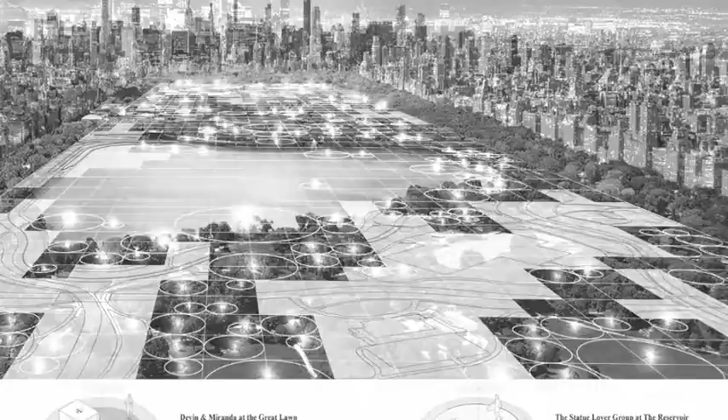We have done projects aiming at helping reforestation on a planetary scale, providing solitary space for lonely urban dwellers in metropolitan areas, and suggesting new protocols for people to utilize public space during the pandemic era. Our vision in this design competition is to build a truly inclusive homeland on which humans and other living systems subsist equally and harmonically. This new post-human territory will challenge traditional human-centric urban development, strengthen the concept of global sustainability, and redefine the concept of oasis.

Planned to be the world's largest waterfront development, shaped like a crescent, the Dubai waterfront is in trouble due to financial crisis, land sinking, rising sea levels, and ecological controversies. What should be built to demonstrate Dubai's ambition to be the greatest self-sufficient and climate-friendly city in the world?

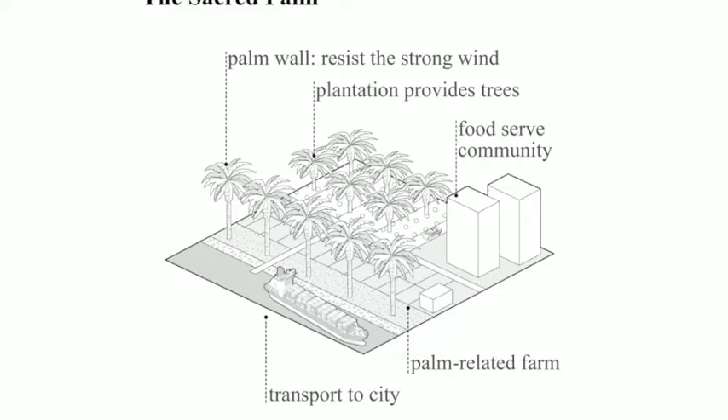Date palm remains an important part of Arab culture, while Dubai's Palm Island project is inspired by the image of a date palm. We argue that the tree can play a bigger role rather than just a graphic reference. This newly conceived date palm will support the prosperity of all life forms, provide resources and technologies to build self-sufficient communities, and trigger reimagination of the city's future.

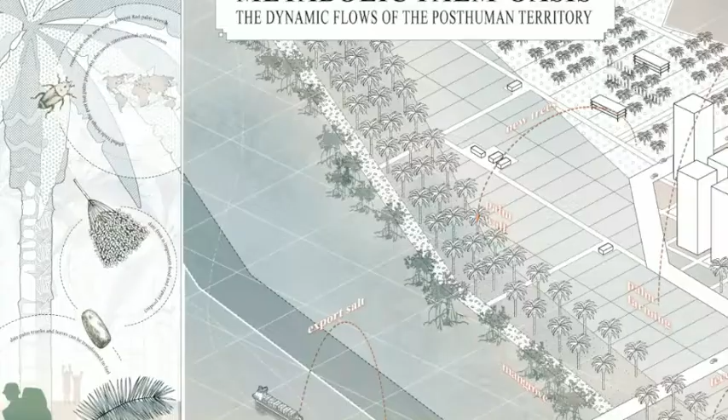For such a goal, 3 palms are proposed in our scheme. The sacred palm is an ecological security system based on the date palm tree. Rows of date palms are planted to block strong wind and stabilize soil, as well as providing food, materials, fuel, and other resources to support the island's metabolism.

The marine palm is a series of artificial islands floating on water with structures going all the way down to the seabed. The leaves are plastic containers, algae farms, and scientist centers, while the stem is sensing devices and sonar hydrophones for detecting the condition of coral reefs and marine habitats.

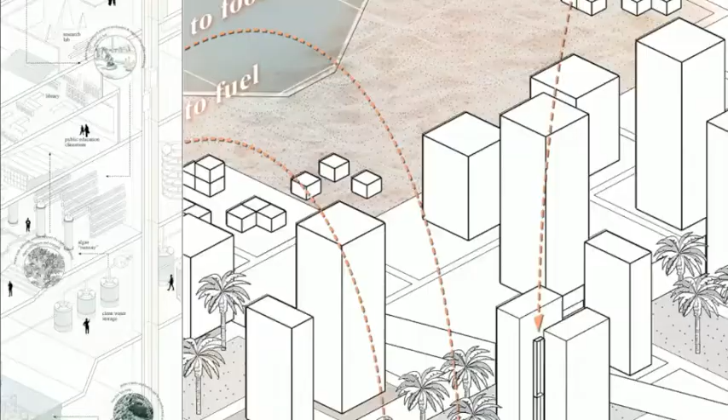The terra palm is a machinic megastructure combining the function of data center, research lab, saltwater purification, and clean energy generation. It serves as a contemporary version of the Tree of Life in supporting the city's everyday life.

So how does the 3 palm strategy apply to the design of the island? First, the sacred palms support the self-sustaining lifestyle of the island's residents by defining the spatial framework. The marine palms float along the coast, while the resources they produce are transported to the island. The terra palms are the engines below ground, offering technology and energy support for the island's daily operation.

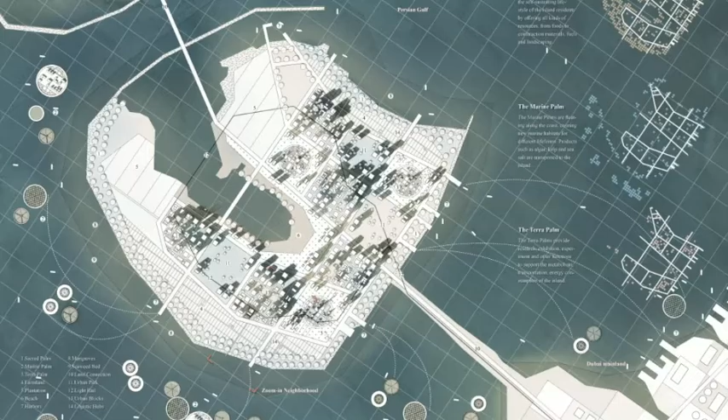The island is reinvigorated, and the lives of human and non-human species are activated through the implementation of the 3 palm strategy. When zooming into a specific neighborhood, one can see the everyday life happening on the island. But what's behind the scene is a complicated yet highly integrated system.

This is the core spirit of our proposal, the Palm Oasis, a comprehensive system underpinning the future lifestyle of the island, just like how date palms supported the traditional lifestyle of the region in the past thousands of years. Please reimagine the future scene of the island with us, with the self-sustaining idea of the 3 palms system, and with the belief of creating a more-than-human neoasis for the island, for Dubai, and for the world.

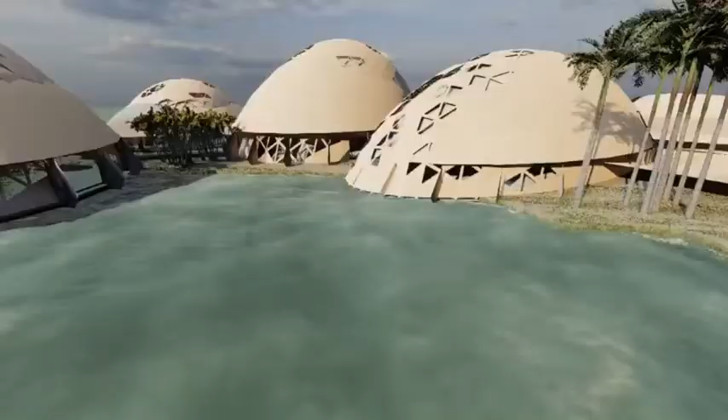Dubai is used to building a lot of high towers, so we started to think in a different way. We made Zart. Zart is the only oasis that can survive if any disaster happens. It's a mixture between nature and technology. We made it indestructible and it has all human needs.

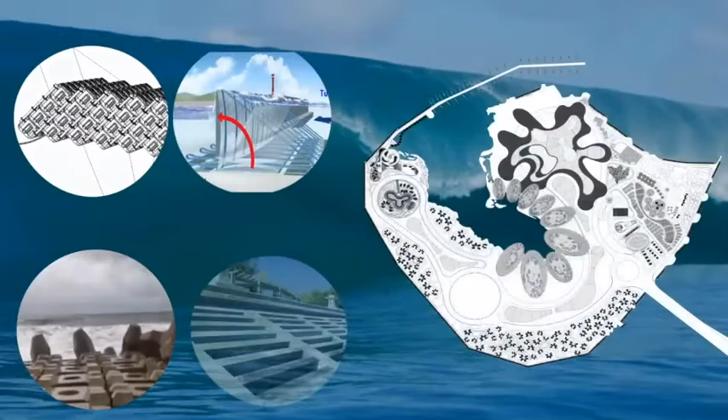In 2050, sea level will rise 30 centimeters. Therefore, wave breakers were used to reduce the intensity of the waves in the waters close to the shore and thus provide a safe shelter.

So we started using wave breakers that produce energy at Zart. In 2100, the North Pole will melt at a very large rate, and this will lead to many incoming disasters such as storms, hurricanes and floods, amounting to death, destruction and the end of the world. Thus, most buildings and towers will be destroyed in many coastal countries.

Hello? Is anyone there? If you receive this, I need your help.

After the great destruction that occurred in many coastal countries, a light of hope appeared to live without the effects of disasters, and this was only at Zart Capsule's mini-city. But how did this happen? When the water level rose significantly more than expected, many coastal buildings were destroyed.

Since taking the survival concept from nature, our only choice fell on the turtle, the most naturally protected being against any kind of disaster, so we took its way of life where it is able to live both above land and below water. Zart Oasis capsules were launched automatically into the sea to sail without being affected by the existing disasters.

Let's see how this capsule mini-city could survive. We have in each Zart capsule all human needs such as clear water, food, and energy. Zart Oasis. It is the oasis in which you can live comfortably and reassuringly. It's the true example of the oasis as it should be. Each part of the oasis will separate automatically during a disaster.

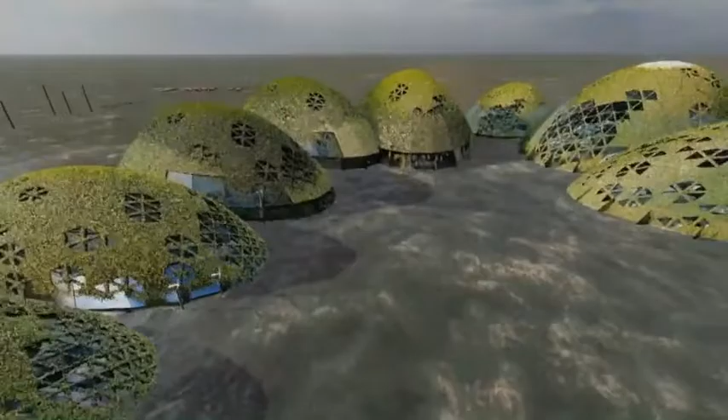Zart will be everywhere, in all coastal countries in the whole world, by 2500. Zart. It's the real home. It is the safety. Zart. It's our last sanctuary.

The Great Artesian Basin, Australia's largest and deepest source of fresh water throughout the inland. Hidden beneath layers of sandstone from an epoch before humans, the Cretaceous Earth has offered us a unique geological formation for which many species benefit. Water, vital for all life on the planet, and the hallmark of the oasis.

That very same Cretaceous crust emerges at the Winton Formation, a mesa rich with the footprints of the past. A fertile land, in jeopardy of desertification. The landscape is ripe for sustainable development, like the creatures and organisms that call this land home. Self-resilience is the way of life when you live in the outback.

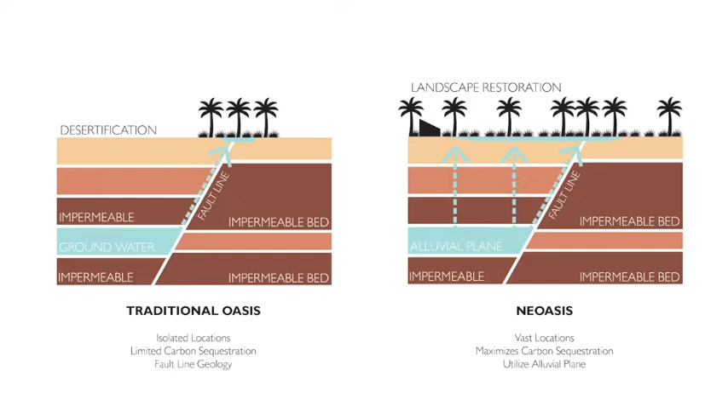The neOasis proposes a new ecology through architecture, infrastructure, and nature. The inhabitants of the neOasis range from both human and non-human entities, which provides resources for all creatures within its landscape. The mesa becomes the home for a multi-species ecology. Tapping into the alluvial plain beneath the surface of the bedrock gives rise to a new synthetic ecosystem. With this new microclimate, biologists and other researchers are given ample opportunity to study emergent species and landscape restoration.

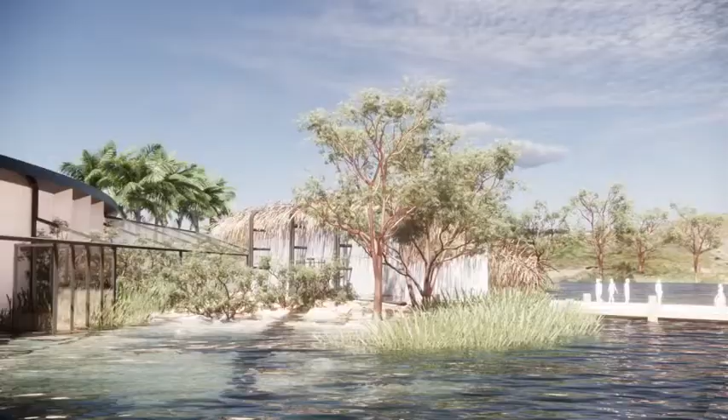The neOasis balances both the manicured and the wild. This balancing act between what is maintained and that which is natural plays a key role in the project. Rows of agriculture are balanced with vast open areas where nature dominates. These two exist where one is no more important than the other. They are equals. Teaming with Australian Age of Dinosaurs Limited, the project seeks to further the research work and dinosaur digs currently located within the Fossil Preparation Laboratory.

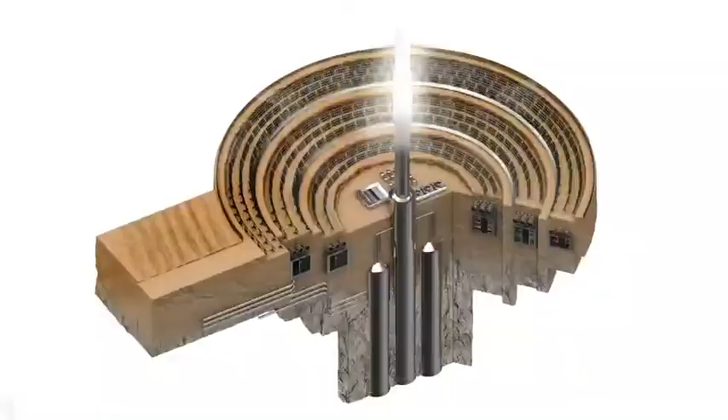Visitors will be able to engage directly with the research happening at the neOasis and witness firsthand its impact on this community. While recognizing imminent global climatic change, the neOasis draws upon its history to act as a method of carbon sequestration. Innovating beyond simple terrestrial carbon capture, the neOasis aims to pursue direct air capture and capitalize on the geomorphology of the project.

Looking toward early and contemporary Aboriginal art, the neOasis draws inspiration directly from the historic and ancient pattern-making of these ancestral lands. Being as much a part of this community, the project seeks to bring those that are close and near to the land together with those that come far and seek to learn, using natural delineations of the surface, water, topological tensions, and those that are synthetic, solar panel arrays, and road. A new hybrid geometry is generated.

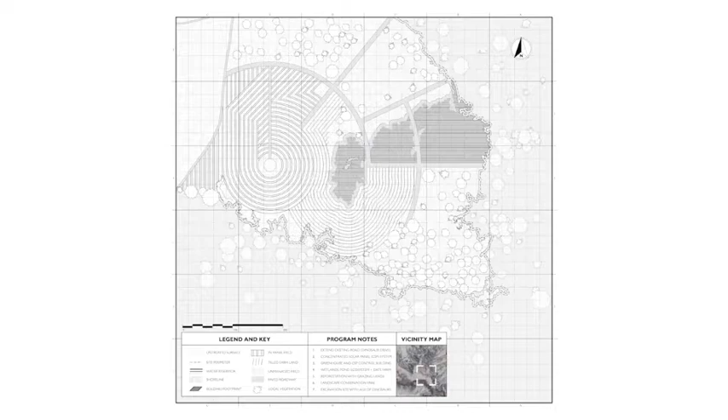This diverse tapestry of humanity brings the neOasis specific to this site. This development brings forth a unique opportunity to generate a new future, one that is tolerant and inclusive of its inhabitants. The neOasis is a place for everybody, a diverse multicultural hub blending nature, technology, and culture, its historical roots and traditions, pursuing new ideas in the next epoch of planet Earth.

Our society is anything but sustainable. Our population is continuously growing, our resources are becoming exhausted, we are running out of time and space. With 95% of the world's population concentrated on just 10% of the world's land, capitalizing on the abundance of renewable natural resources at our disposal provides hope and a way forward into the future.

This project explores the reimagination of the oasis to improve livability in the face of increased desertification. The literal definition of an oasis is a fertile spot in the desert, mostly where water can be found. On a metaphorical level, however, an oasis symbolizes a moment of respite from the harsh conditions of the environment. It becomes more than just a mere fertile spot. It becomes a place of hope in the middle of despair. It becomes a promise of a better future.

With our design, we intend to create more than just a place that people can live and work in, a new oasis for its inhabitants.

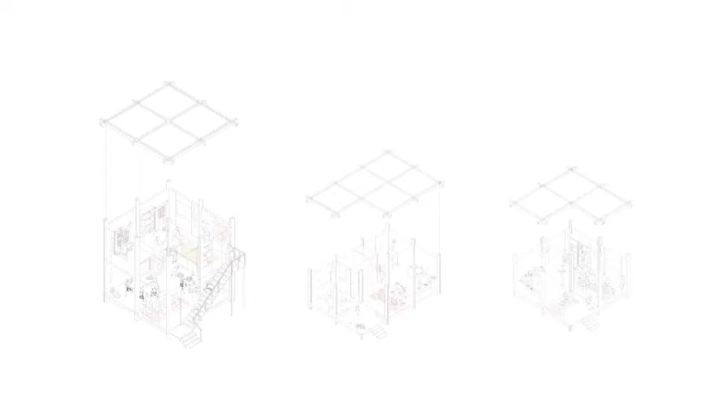Our proposal consists of 3 typologies that are an armature for the system. These simple structures are modular designs that are highly adaptable, creating flexible space that can transform into whatever they are needed to be, without imposing an external identity onto the inhabitants.

These typologies will be constructed from materials found within the system: wood milled from the date palm grove and earth insulated with date palm leaves. Infill panels are placed on the exterior wall facades and assist in the collection of water and food production.

The first typology is the production or economic typology, which capitalizes on the skills and materials produced on-site within the desert climate and financially supports its inhabitants.

Moroccans have a strong tradition of weaving. The leaves from the date palms and the processed sabra silk from the Moroccan agave will be processed and woven for export, allowing the inhabitants to strengthen their cultural traditions and produce an income.

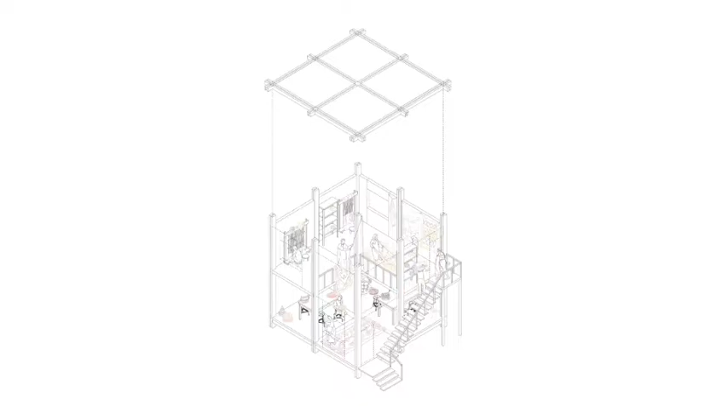Excess food produced on-site, including agave nectar, spices, turnips, oranges, sunflowers, tomatoes, watermelons, and dates, to name a few, can also be processed and sold to surrounding villages.

The second module caters to the residents within the oasis, supporting a higher density within the existing area to accommodate more inhabitants and create a thriving oasis.

The last module is a cultural typology, providing space for people to come together to pass on skills and traditions of place. As an inclusive area, it gives opportunity for everyone to participate in society and ensures that everyone's needs can be met through a sense of belonging.

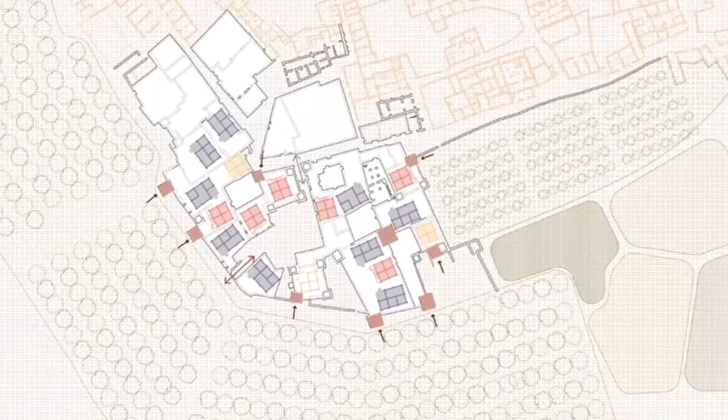The established system through the typologies will create an oasis perched on top of the existing ruins of the Ait Ben Haddou Citadel. Access to the settlement occurs through the towers located at the edge of the existing fortress walls. These towers serve as vertical circulation for people and water distribution, ensuring a high level of permeability throughout the master plan.

Water will be sourced from a nearby aquifer that uses a traditional Qanat water system. The water will be transported up to the settlement via a series of solar-powered Archimedes screws aligned within the circulation cores.

Typologies also feature a water collection infill panel that captures the humidity from the air and collects it within dwellings, similar to the work undertaken by Warka Water and inspired by darkling beetles of the Namib Desert.

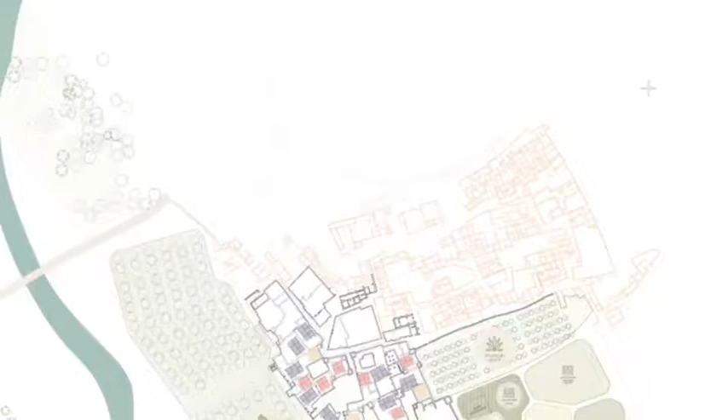Food will be produced in allocated spaces surrounding the site and the infill panels of the modules. Plants that can grow vertically and in desert climates, such as beans, peas, eggplants, cucumber, zucchini, tepary beans, pumpkin, paprika, jicama, will be grown in the infill panels.

Plants that require more soil and land, such as turnips, date palms, watermelon, tomato, sunflowers, and agave, will be grown in the surrounding land. Sited in a desert climate, the area reaches a temperature high of up to 40 degrees Celsius and relative humidity of 60%.

Within the human comfort range, falling between 22 and 27 degrees, and relative humidity of 40% to 60%, climate analysis has revealed that the climate is comfortable for only 20% of the year, making passive cooling throughout the design essential.

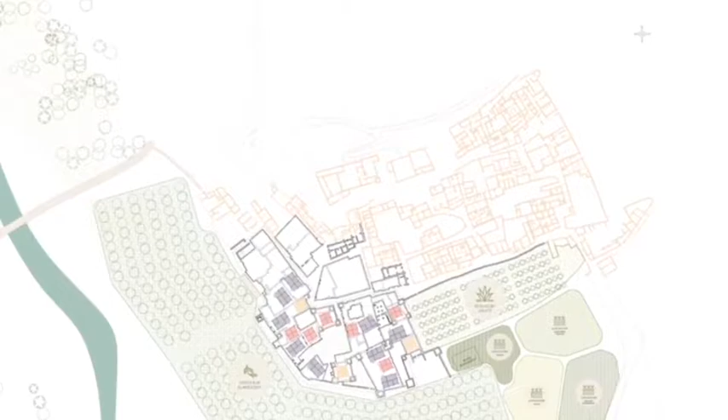The positioning of the village above the ruins allows for the optimal capture of the northern and southern prevailing breezes. The placement of the date palm grove to the south ensures that the warm winds from the Sahara Desert are cooled before reaching the oasis.

The modules have been designed to allow for cross-ventilation through the spaces. The choice of rammed earth as the primary material of the module ensures a high thermal mass and provides the opportunity for night flushing as a means of cooling.

The water collection system throughout the master plan provides opportunities for evaporative cooling, and sun shading on the windows assists in reducing the internal heat gain on the inside of the buildings.

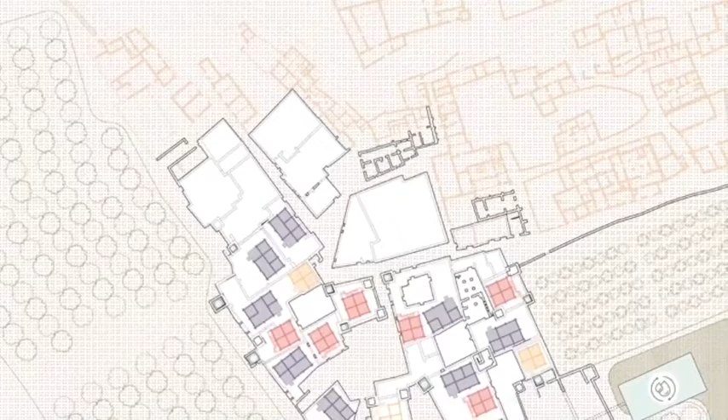Solar panels will be used to capture sunlight and convert it to usable energy to power the oasis. Solar panels will be placed on the modules, in addition to a more extensive solar power farm outside of the settlement, to support the energy requirements.

As a precious commodity in a desert, water will be treated at a Biolytix BioPod that uses tiger worms and microorganisms to convert raw sewage and wastewater to high-quality irrigation water for the date palm groves and agricultural fields.

Waste from the production modules, particularly food processing and weaving, can be used as fertilizers to enrich the agricultural production.

These simple structures act as modular systems that are highly adaptable depending on the usage required. They respectfully add onto the existing citadel without any disruption, retaining the language and essence of the historical site.

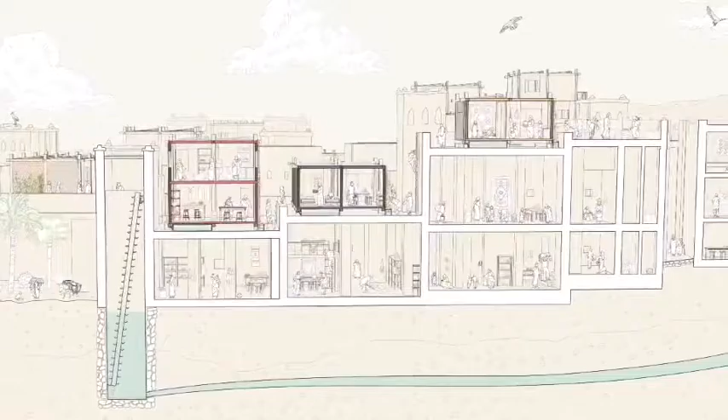Utilizing natural resources and environmental considerations enable this design to naturally grow as an ecosystem within a desert climate, making it an oasis that meets any requirement of the human needs of its inhabitants, and ensuring cultural and economic progress.

Amidst the depressing city life, resources guzzled out over the long-gone remains of nature. The future felt as dull as the city's concrete jungle. I feel helpless. Hope is no longer with us, echoes around the city.

Just then, a blaze flashes over the dark skies. The light flared so bright that people were hiding from it. A bird figure strikes faintly behind the light.

After the light vanishes, people realize that seeds are scattered over the town. One of them fell into a patch of arid land and grew into a sapling. Only then the citizens realize, from the burnt ashes of life, the phoenix will rise into its glory, and so are they. The reinvention of the city begins, the oasis of the phoenix.

Welcome to our sustainable city. We built this together out of dry soils years ago.

Please park your vehicle here under the shades of our solar panels. We welcome visitors to stay at these apartments.

The food of shopping streets are fresh from our permaculture and hydroponic system. Please try our handmade craft from the date palm grove, managed by the women's community.

Our central oasis supplies water all over the city through piping, which also serves as the downstream of the four water canals. A mosque is built on the water surface of the oasis as the religion center of Muslims.

Our international school offers education with a culture-based and sustainable curriculum. The students will also be given community-based projects for permaculture and oasis development.

The permaculture area consists of food forest, community farm, production forest, and husbandry. This site produces 50% of total consumption, managed by the local farmers and agricultural community to reduce the dependency from outside products.

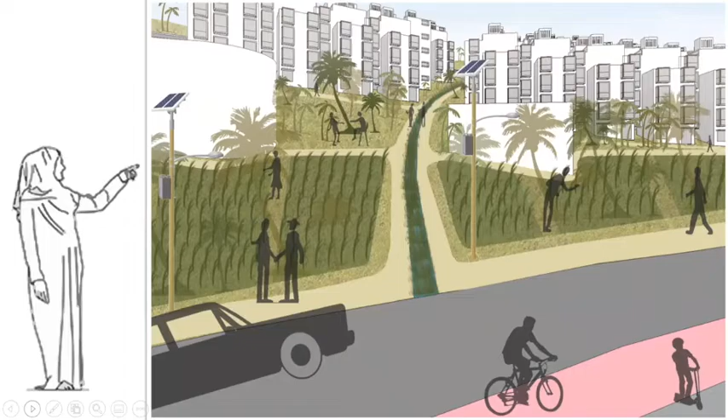The upper part of the city is the housing cluster, which was built near the field so the local residents can easily work there. The houses are built according to incremental housing and designed based on sustainability principles.

Each block of the neighborhood is equipped with its own water treatment plant and waste pickup sites.

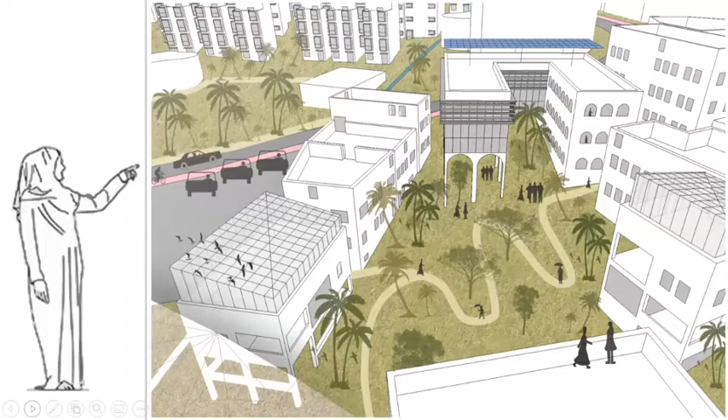The mini oasis is built on the center of existing buildings that are reused for creative culture centers, including the women area, the women's center, as well as the neighborhood council.

Learning Center is the heart of the learning community and networking of the city, where residents and visitors are able to hold meetings.

Something that is as small as a seed can bring significant development if everyone works hand in hand. This is the glorious era that must be preserved, where the sky is blue and the gardens are green for the longest time.

All this time, the phoenixes are secretly watching them behind the trees, showing their fire wings and the sun to the sky. Nobody knows why. One thing for sure, the birds of hope continue their journey looking for another land.

For example, we are using eggshells as a basis to create habitable cocoons. Due to the prevailing weather conditions, they require good ventilation. Therefore, to create aeration, the buildings will be elevated. Installing a cradle-to-cradle design with locally available materials allows us to put in place a regenerative and circular economy, promoting a sustainable way of living from one generation to the next.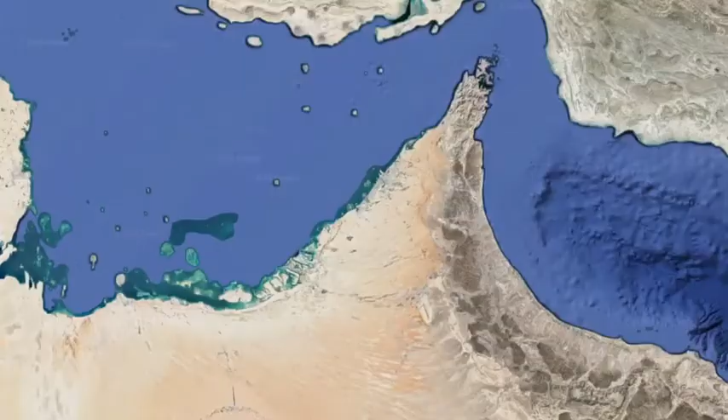What is an oasis city? A safe place to work, walk, and rest. It is EXPO2020, a pilot neighborhood for a future island city in Dubai.

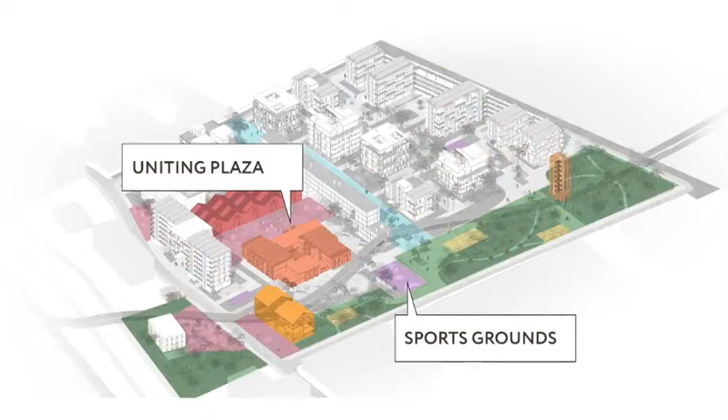It reinterprets the legendary urban grid, blending the site's post-industrial landscape with a strong multi-comfort strategy. The layout features a huge plaza, semi-private community alleys and courtyards, immense archways, intricate facades, and brightly lit horizontal urban farms. Art centers in ex-warehouses, neighbor community centers, on rooftops and ground floors.

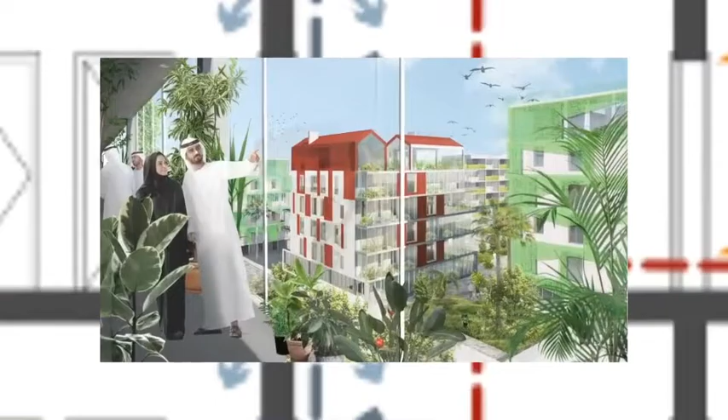Holistic environment control system ensures the dwellers' comfort with green roofs and facades, shady balconies, thermal and solar panels, and marine water filtration. Accessible pink-led urban grocery farms provide healthy local food. A pedestrian bridge shows a charming skyline of the pilot neighborhood. It is a detailed model that can become a prototype.

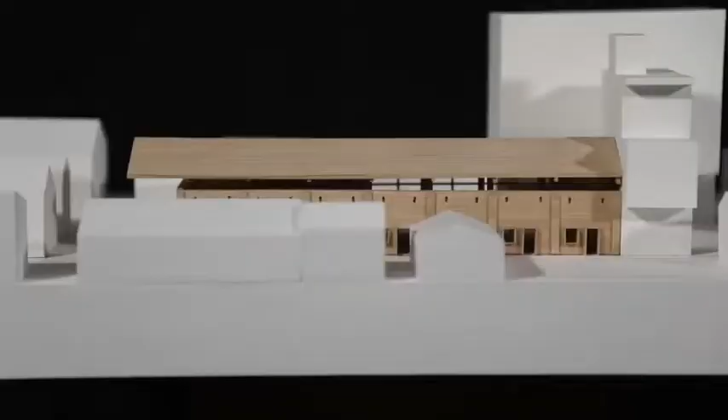We are TIACH. In Buffered Space at Kazan University, we address experimental design and social patterns, competing with the world's best architecture schools. Our students are idea generators who can conduct work from the initial concept to detailed design project. In a single space, diverse students conduct visionary research and practice, using professional tools from hand drawing to digital prototyping. Our studio has won architectural competitions in the USA, Canada, China, and Europe regarding sustainable construction, eco-materials, traditional lifestyles, and symbiosis with nature. By raising courageous professionals, our city and the world will be transformed.

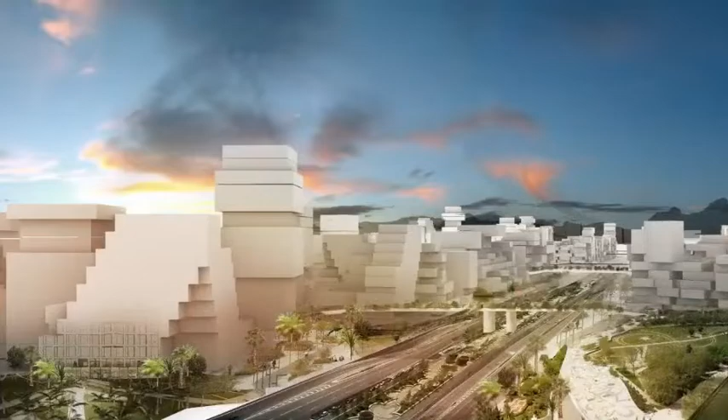Can there be a dream city in the Australian outback? Dinawood is the epicenter of cinema fantasy worlds within the famous Dinosaur Trail. Blending iconic buildings with natural hills, Dinawood City fosters local businesses and arts, attracting tourists, artists, and ecology scientists. The existing road becomes Avenue Australia, a vibrant storyline of sustainable urban life.

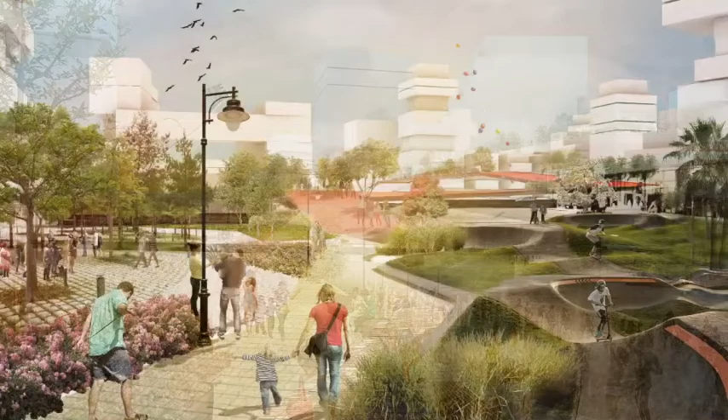It impresses visitors with monumental architecture resembling ancient rocks and with dynamic circular energy technologies. Green Dinawood Hills with a cable railway lead to the natural prehistoric scenery, while the city itself resembles a film studio. Public squares bustle with events like cinema pavilions.

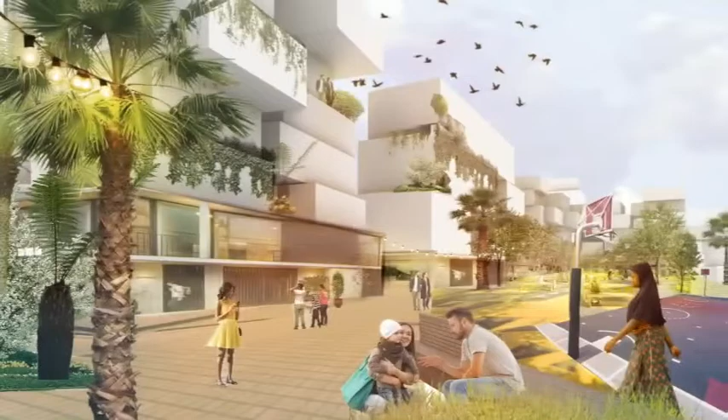Experimental housing provokes personal gatherings. As a creative production site, the city leaves a low-carbon footprint. Its game-like patterns inspire people to be curious and creative. It is a detailed model that can become a prototype.

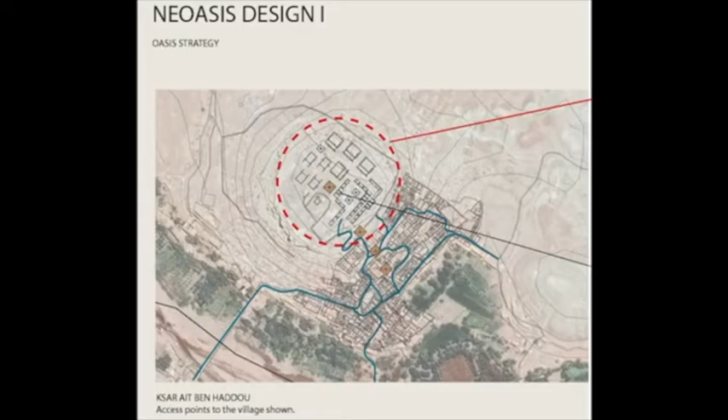Our design concept consists of reviving the already existing buildings by adding more facilities for people of the town to use, such as electricity and running water. Using sustainable architecture and design techniques to address the bioclimatic issues and socio-climatic points to avoid desertification, and also give equal opportunity to the villagers by reteaching them traditional building techniques and new techniques to create a self-sustainable village for themselves. Our design proposition is that we are suggesting a new village centre with the production of new infrastructure.

Our oasis strategy is reinstating the khettara technique. We created this using sails in which form was inspired from the date palm trees from the oasis. The construction consists of using wood from palm trees and fabric made by weaving. This can be done by villagers and passed down to future generations.

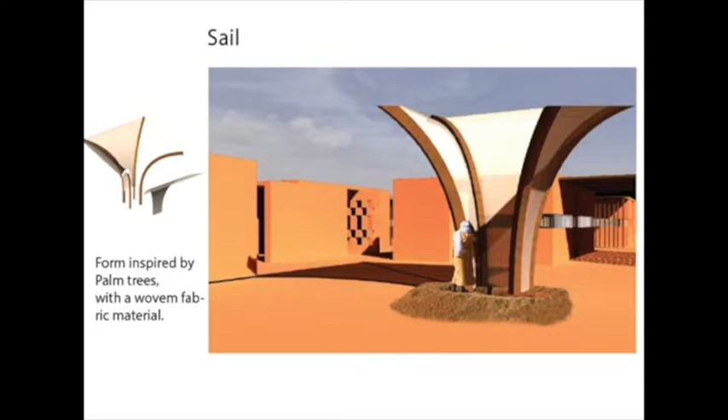Powering the oasis: to bring power electricity to the site of the Ksar, we will tap into a solar power plant in Noor, located 40 kilometres away, to provide electricity to the town through the national grid. We also want to include separate solar panels as a backup source, which inhabitants can install easily on the roof. We found a new technology that is film-like and can be installed very easily and printed from special computers.

Re-educating traditional practices. In order to create equal opportunity and allow all villagers to be part of a thriving town, we can use old weaving techniques where women can learn and reteach the skill and technique to other people. The khettara can be created by the men or women who are up to the challenge. All of the new proposed buildings will be prefabricated blocks to create an easier build.

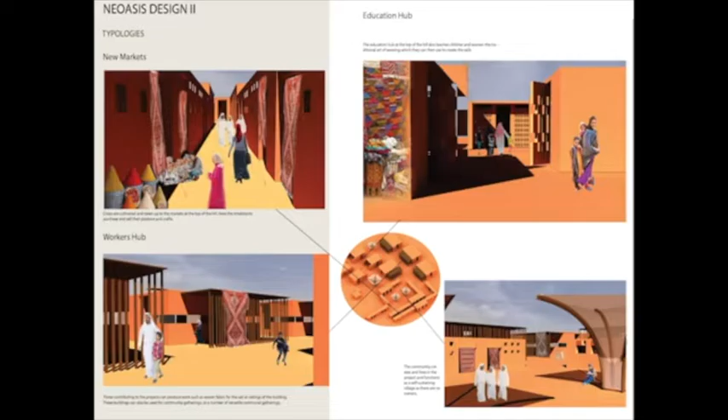Our typologies: we also aim to introduce 3 new typologies to the new village centre at the top of the hill. With this new area, we hope to create a space in which the community can gather and enjoy together. We plan to propose new markets, some education hubs and working hubs. These spaces are very adaptable to what the community will want and use the spaces for, giving great opportunity for learning, working and trading.

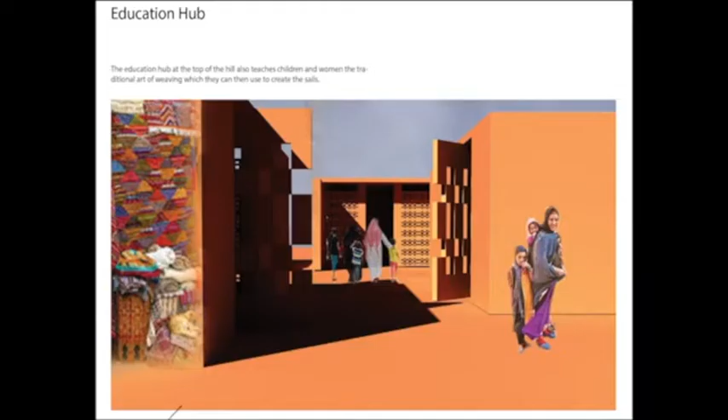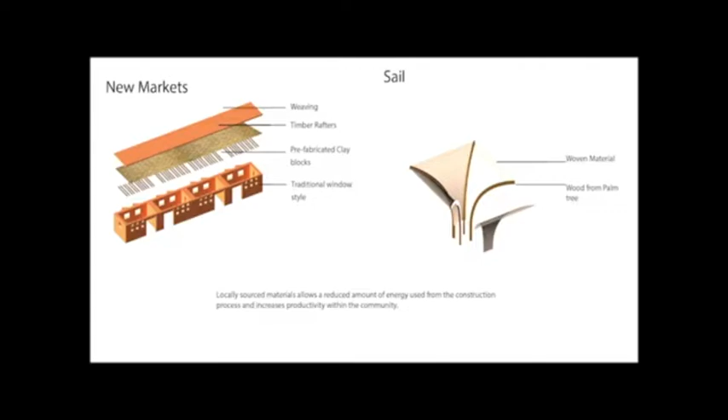Using local materials, it will not only be sustainable but very low costing and energy efficient for our construction methodology. It will also be easier to teach the locals construction skills and also for them to maintain it. The buildings will be made from local materials such as prefabricated clay, rammed earth walls, timber, palm rafters, woven fabric ceiling which will allow women to participate, and local craftsmanship. Window types keep the traditional architecture with some design changes to improve performance.

Also, we will be implementing good passive design methods. Everything has been carefully integrated into passive design strategies to create livable habitats. Modular windows can turn in accordance to solar access and wind access at any time of day. Woven fabric used in the roof construction will act as local insulation, reflecting the traditional customs.

The placement of the buildings will further allow circulation through the town and also small pockets of open spaces where events can occur, also controlling the wind access and solar access for certain buildings. Bringing solar power to the town will give universal access to safe and affordable drinking water and sanitation. Solar panels as well as reintroduction of a khettara will create a sustainable environment for the town.

Our urban circulatory of resources begins with the environment. Water source is then taken to the oasis, which produces food and vegetation. This then circulates to the community through cultivation and markets, then food consumption, and then down to food waste management, going back into the oasis to start the cycle again. We aim to make this a very sustainable part of the new life of the villagers that come over to our site, and hopefully it will enhance their lives.

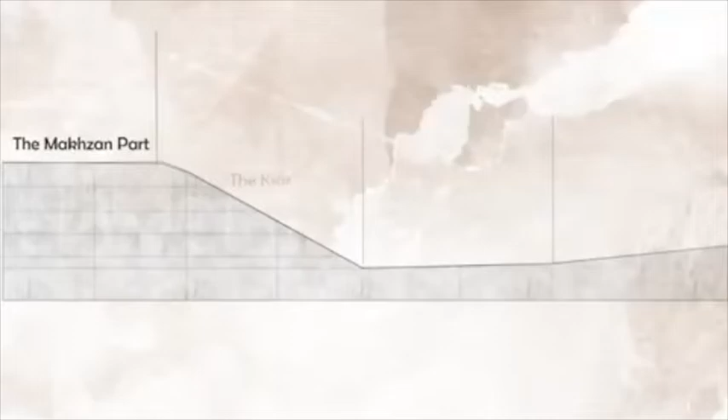The region of Ait Ben Haddou includes 4 main levels: the Makhzan, the Ksar, the river and oasis, and the new center of Ait Ben Haddou.

The main objective of the Oasis Lab is to reflect and advocate the potential future of Ksar Ait Ben Haddou while celebrating the Oasian culture.

Through the use of materials, technology, and landscaping, the project primarily explores and attempts to address the following: breaking the depletion of the oasis and its habitat, combating desertification, ways the Oasis Lab can impact and contribute to the surrounding areas, evolving labor skills in Ksar Ait Ben Haddou, highlighting Moroccan culture and the desert oasis experience, and improving livelihood opportunities. A word that brings so many concepts to one's mind in climatic, social, lifestyle, historical, and financial fields.

An oasis is a place in desert that contains water, supplied by spring or another underground water source. With this in mind, the Oasis Lab sums up the intent of the project to reflect the oasis experience and its ecosystem. Also, an oasis is often depleted of its natural resources.

The Oasis Lab attempts to combat desertification through traditional techniques: controlled water collection and desalination, seeding, careful selection of plants, soil modification, and renewable and recyclable energy.

The project attempts to symbolize the oasis of the future by trying a new way of using traditional materials and advocating to improve labor skills.

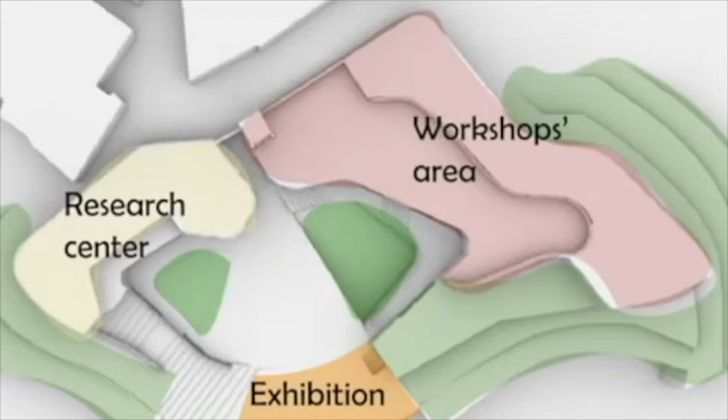The Oasis Lab is made up of 3 main zones: the workshop area, the research center, and the exhibition gallery. The research center is dedicated exclusively to the issue of desertification, and the exhibition gallery exposes our ancestral techniques.

The project aims to contribute through urban and architectural solutions for the self-resilience of the region. The lab will consistently observe the health of the oasis, its surrounding and landscape, and its habitat. It will continuously test for new ways to ensure access to sustainable food, energy, and environmental resources in the Saharan Desert.

Greetings everyone! We are Urban Weavers. I am Nazila Karim, my area of specialty is in urban and regional development. I'm Karol Hazmi Zaini and I'm an urban designer.

Urban Weavers' philosophy is to weave all elements within and around the chosen area to create a tapestry which represents the empowerment of a community as a whole, particularly women in the context of urban Middle Eastern settings.

The current neOasis site sits strategically between 4 neighborhoods that sit along the ridges of the hill. The main third ring road separates the pedestrian movement to other locations within the 1 kilometer radius.

In the future, with the implementation of the future bus routes in Mecca, this area will be an important transit that would benefit the local residents and visitors alike.

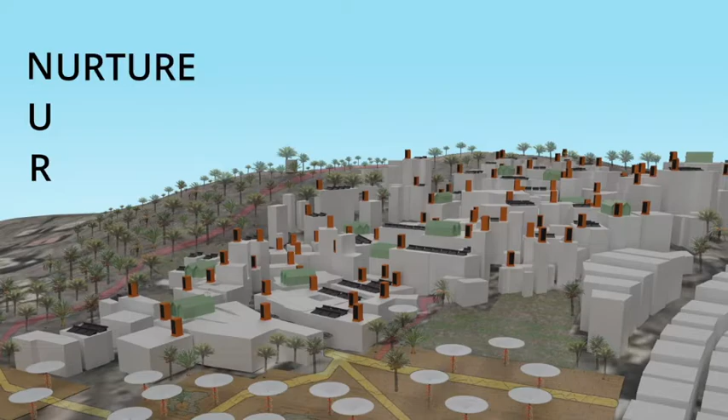There are 10 NEO programs that would support NUR. These are NEO Building Materials, NEO Productivity, NEO Food, NEO Renewable Energy, NEO Inclusivity, NEO Network, NEO Water, NEO Socio-Cultural Regeneration, NEO Palm Grove, and NEO Circularity.

Kudai Oasis retains and improves the existing urban form, an urban village that produces its own food, well connected to other parts of the city, and its layout is attractive to visit and enjoy the scene.

Kudai Oasis gives opportunity for women to become part of the urban village. While their role of looking after the family is a huge responsibility, the urban setting provides spaces for women to involve in the social economy through gardening, hospitality, and dissemination of cultural knowledge.

Our design proposal includes a village plaza with urban farming for community gardens to be set up, linking the neighborhood with pedestrian paths that give access to future bus transits.

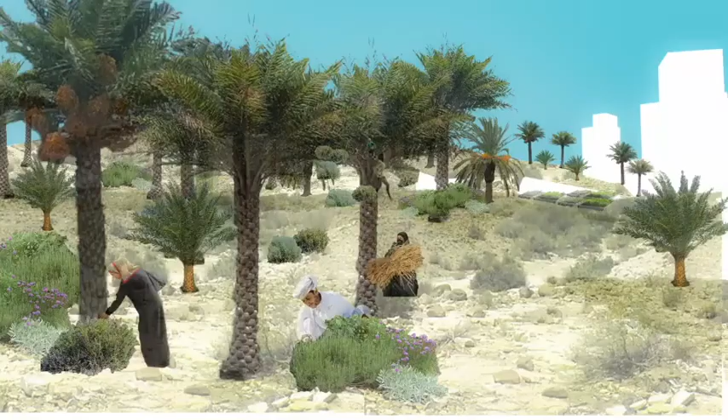The rooftops are ideal for other programs that will include solar panels, vertical farming, and leisure decks. The surrounding area is ideal for the planting of date palms, as they are versatile plants in the region that provide nourishment, shading, and building materials.

Surrounding the Kudai Oasis will be hiking paths as a recreation and leisure facility for local villagers and Meccans in general. The herbarium is the center for dissemination of local knowledge, especially amongst women, as they are the knowledge holders of medicinal plants and their uses.

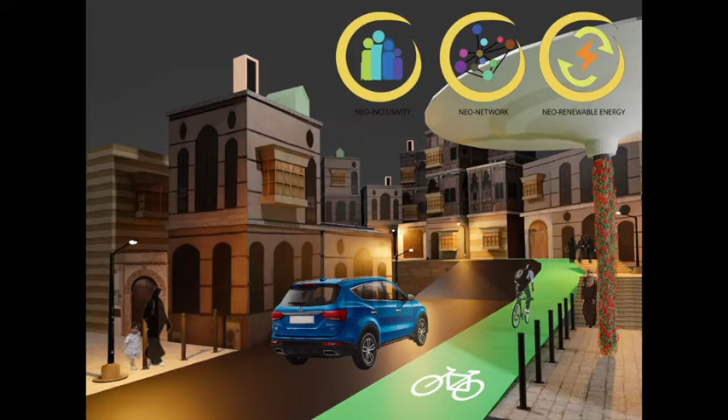Kudai Oasis maintains its urban form and encourages the use of local vernacular Hijaz architecture as its identity. We hope that our idea will uplift the informal settlement of Kudai to become a model for sustainable urban settlement. Thank you!

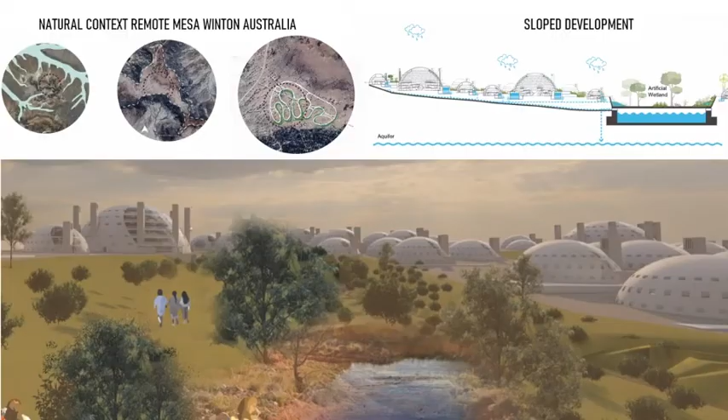To achieve this, we've taken an urban design approach which looks at the ecology of the neighbourhood holistically. First, we looked at the site to learn how native biodiversity survives the climatic conditions. We noticed that the natural elevated plateau protects native vegetation growth and habitats along the southern fringes.

Learning from this, we've elevated our settlement to mimic the landform and create protected spaces for nature to flourish. By also integrating man-made water capture and storage technology, we can create a small artificial wetland system which can grow over time and enhance the overall environment, merging the urban and natural worlds within one ecological system.

Beyond this, we must also focus on social integration and productivity. We've aimed to create diverse spaces for residents to gather as a community within buildings and outdoors. Large structures on the site can act as community and productive spaces, while smaller pods are primarily used for residential purposes.

Community buildings can accommodate education and business-based activities, such as an informal university, where educators and students can consider their own self-learning and research opportunities.

A connection to the formal world should be retained here for a successful scenario, which creates a feedback loop of knowledge, resources, and businesses between this neighbourhood and the formal world.

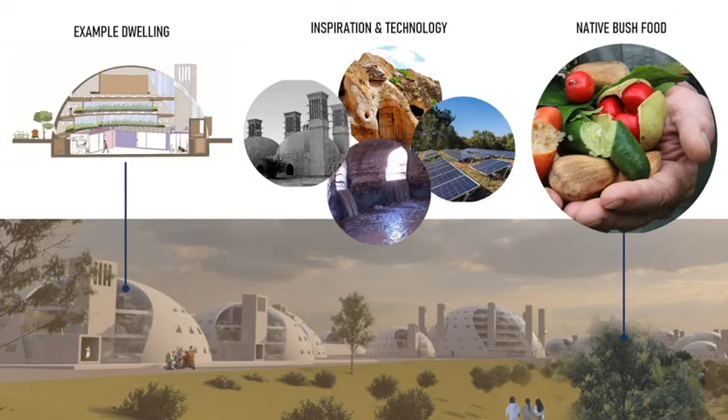Within this scenario, the community will need to engage and work together to collectively manage their resources and food production, especially as they develop and grow.

We believe successful, sustainable settlements require a cohesion of social and physical solutions, which we have explored in this scenario through an urban design-based approach. More details on our approach can be found within our accompanying presentation. Thank you for your time.